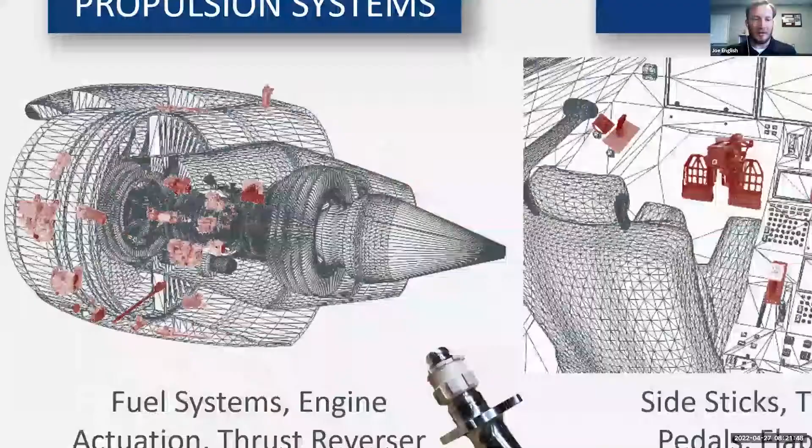Woodward as a whole, we make a lot of different turbine combustion components. Now that means everything in a turbine engine, like you see here on the left-hand side, and all of these parts here in red. If we zoom in on them a little bit, all of these different components - fuel controls, manifolds, sensors - will deliver that jet fuel into the engine and drive the combustion process for that engine. We make all of these little red components.

Zeeland focuses on fuel nozzles, fuel injection, ignition. And the cool part is on the military side, we work on afterburners, which take you from a few hundred miles per hour to over the speed of sound, breaking the sound barrier. So it's cool to be involved in hardware like that. The rest of Woodward also makes flight controls and various hydraulic actuation components on a plane. So if you've flown in the past, I don't know, 60 years or so, you've probably interacted with a Woodward component in one way or another.

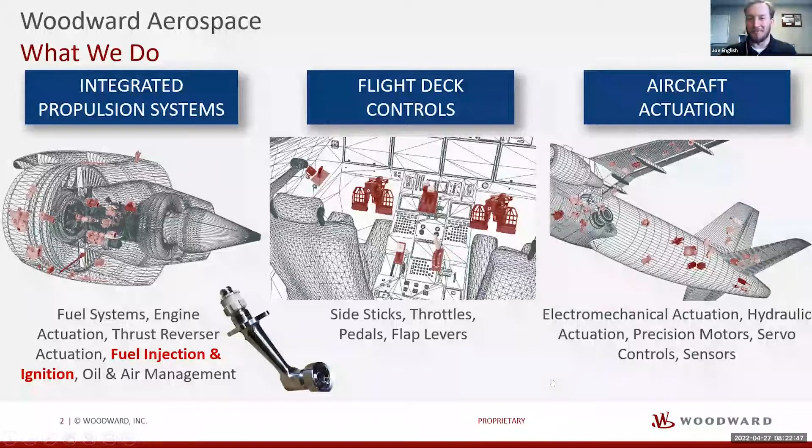So let's get into what AM is. Additive manufacturing is simply a term used to describe any manufacturing method where material is added rather than removed. Where Michael was talking about milling or a lathe, turning and that kind of thing, material is being subtracted away until you reach your final shape that you want to use.

For our process, my team focuses on additive, and that can mean plastic additive manufacturing, where you have say a vat of resin that gets processed by a light, and then you build it up layer by layer. Or some of you may have seen an FDM machine where a filament is deposited by a small head, and that runs around until you reach your final shape.

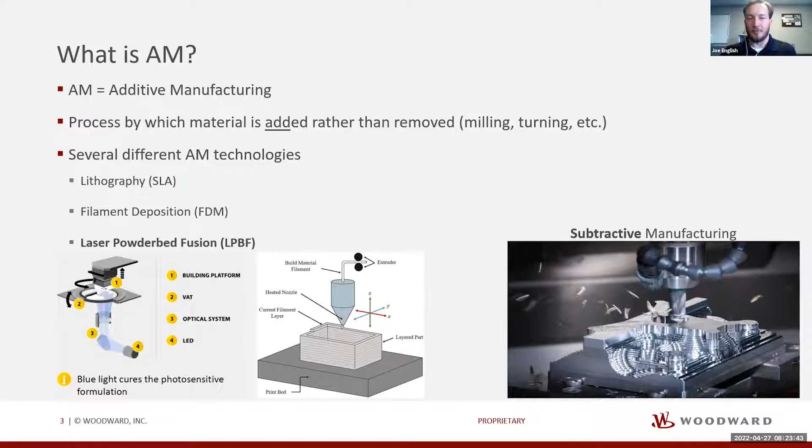But the process my team works with is mainly laser powder bed fusion. I know this is a pretty busy slide, but maybe you guys will have a chance to look over this later. What we focus on is delivering this very fine metal powder - it's almost like dust - into a working chamber. And then we take basically a laser and we weld that powder to surrounding melted material and the powder itself to build our shape up. I'll have a little video that shows how that works.

But once you fuse an individual layer, this platform moves down, and then you provide a little bit more dust, and then you weld that again, and you do that over and over and over until you've built up your part within the powder bed chamber.

Now, there's a lot of other technologies in this space that I'm not going to focus on today, but I really encourage you guys to look up because it's really interesting, and there's going to be a lot of opportunities for interested engineers and interested manufacturing people to get involved with this technology. So directed energy deposition is very similar to that FDM, where metal is welded and placed onto the hardware at the same time.

There's some really cool developments out in California where people like SpaceX or rocket companies are basically 3D printing entire rocket combustors or rocket nozzles. You can look up some cool videos on that.

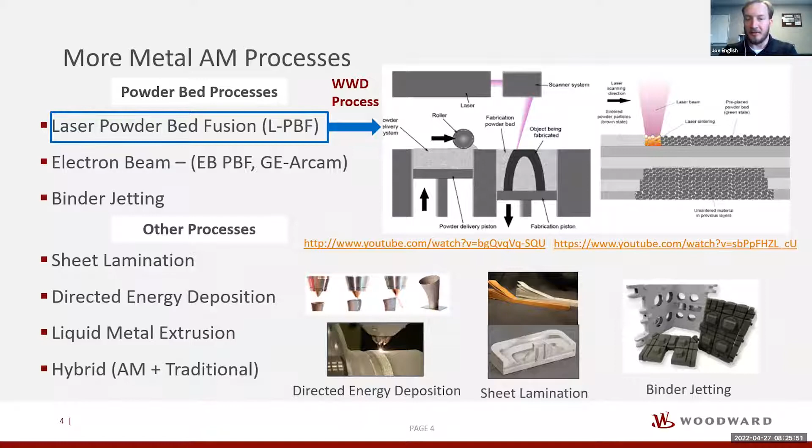And then there's other exciting technologies where they're combining additive manufacturing and subtractive manufacturing. So you would have one component of your machine that adds material up, and then another component, say a tool, that comes in and removes material to the exact final shape you need. There's some really exciting developments going on, and working with at least laser powder bed on a day-to-day basis makes my job pretty interesting.

So this is a quick look at what my workspace looks like on a day-to-day. When I first joined the group, we were in a small room, maybe the size of somebody's bedroom, with one machine in there. Now we've quickly expanded to where we have 4 machines, and we're going to get 3 more printers this year.

And this facility is all very safety centric. That metal dust, you have to be very careful with to make sure it doesn't get on your skin, get in your lungs, or combust—not necessarily in a very volatile way, but you have to be very careful with it. So we're very safety centric here.

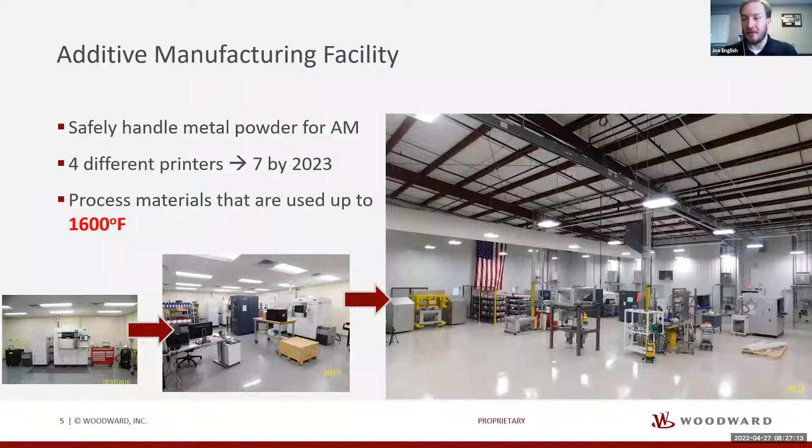And the cool thing is we work with materials that are used in the jet engine, and that's a very harsh environment. The engine can get up to 1600, 1800, 2100 degrees depending on where you are. So our materials right now can actually be used within negative 60 to 1600 degrees Fahrenheit, and we have to be able to design for all of that. My team works to make those components.

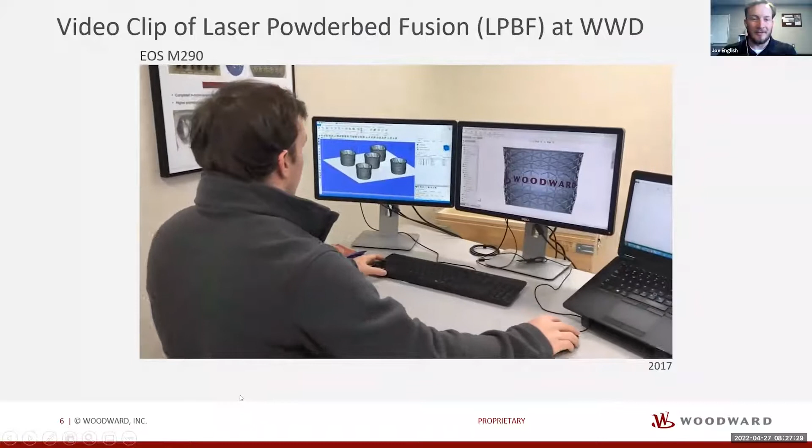Let's go through a quick clip. I don't want to take the whole time sharing this, but we made this a handful of years ago in 2017. That is yours truly, with a bit less hair on my face, more hair on my head. But this is a quick look at the machine.

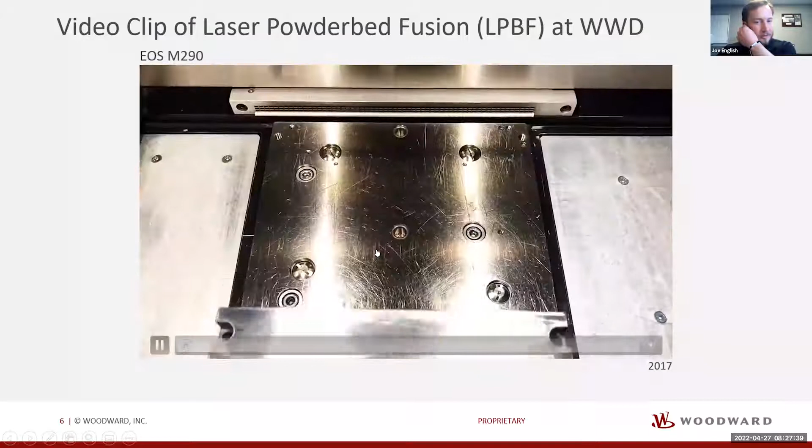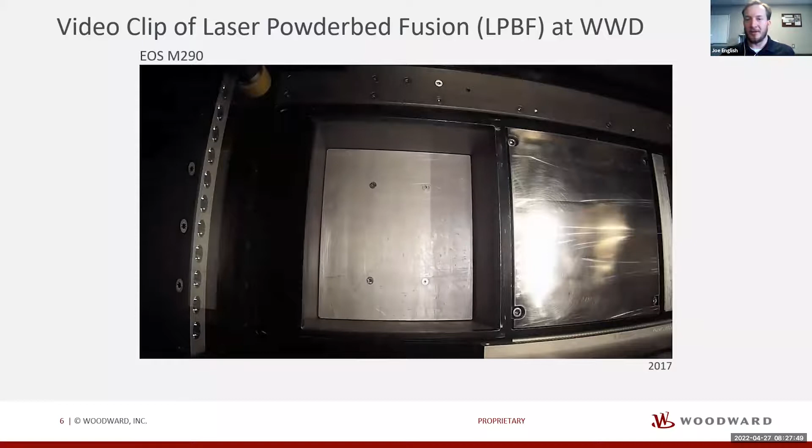So when we load in a plate to get it started, we have to take a stainless steel build plate and actually bolt that into the machine. That's the platform used for everything else to be built on. We have to make sure that's really flat so those first welds have good adhesion to the build plate. Then we load in this powder and run it through a sieve, kind of like what you might have seen in a sandbox growing up, to take any of those really big clumps out.

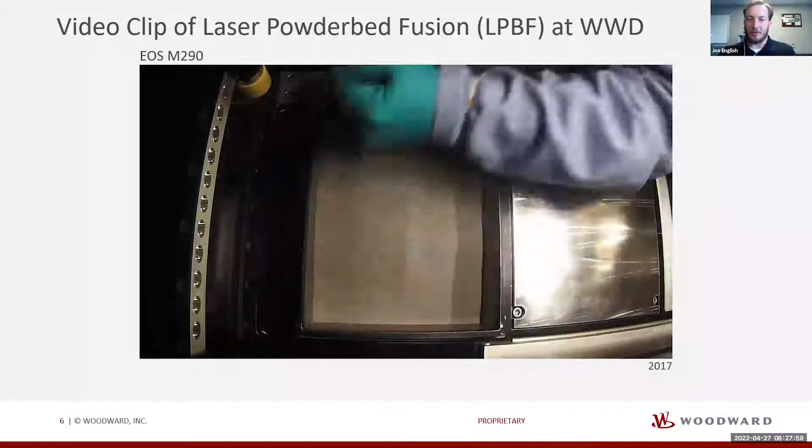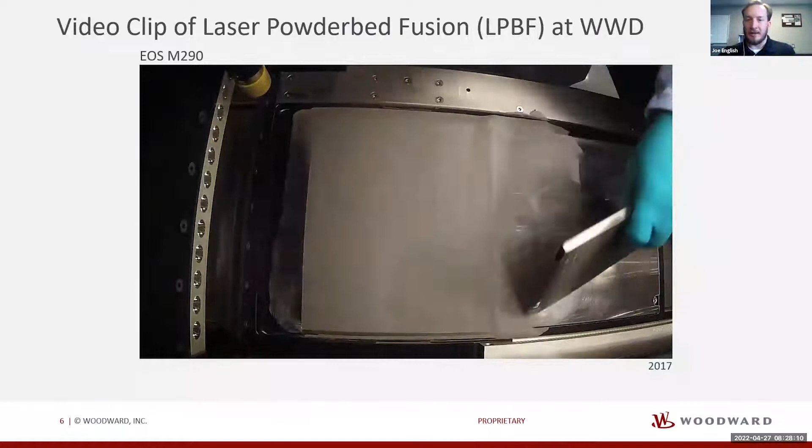We flatten that out and make sure the machine is ready for those first couple of layers, again just to make sure those first layers are good so the rest of the process is stable.

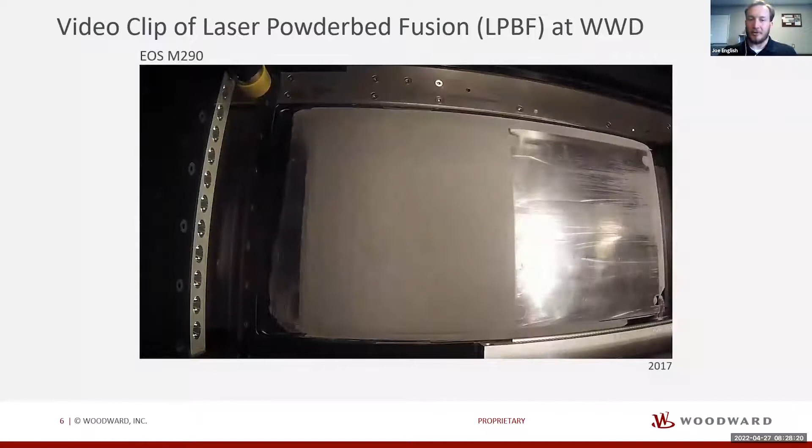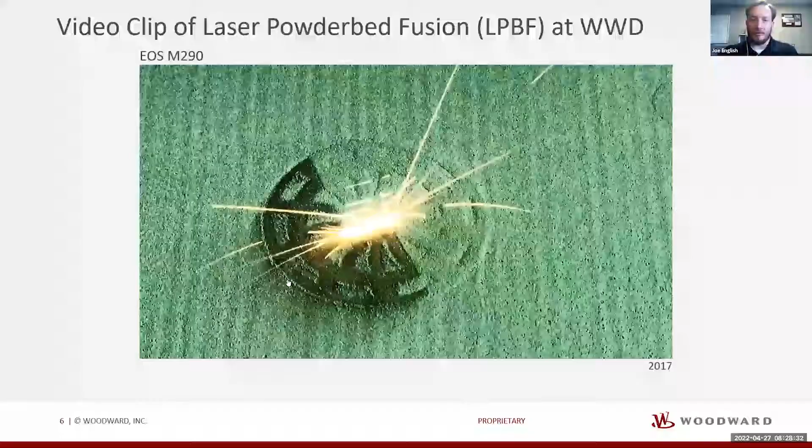So this is a top-down view, and now we're on the side, showing the laser actually welding that dust to the metal plate. It looks like it's moving across in a band, but really it's moving at nearly 1 meter per second at a small spot size, jumping back and forth across the part. So it looks like a band, but it's actually just moving that quickly.

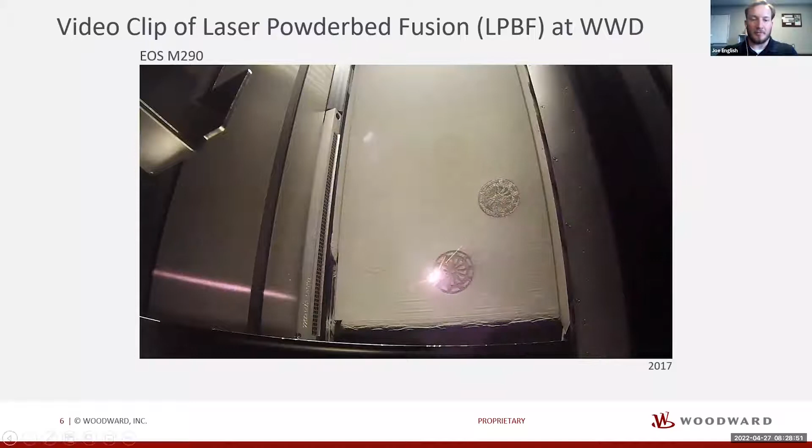This is going to be fast forwarded, but if I pause, you'll see this middle platform move down. This recoater arm will come across and provide a new layer of powder. We repeat that over and over, say 2,000 times, and then your part is done.

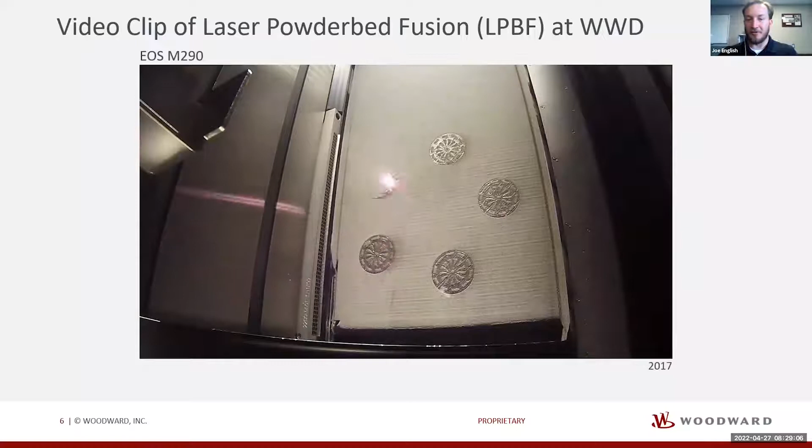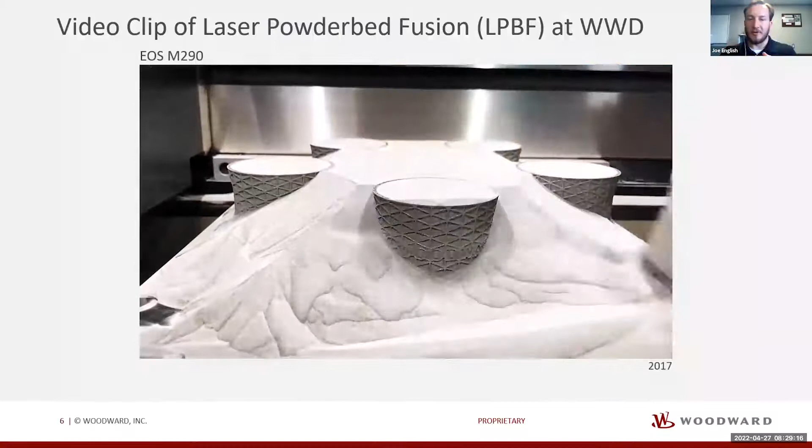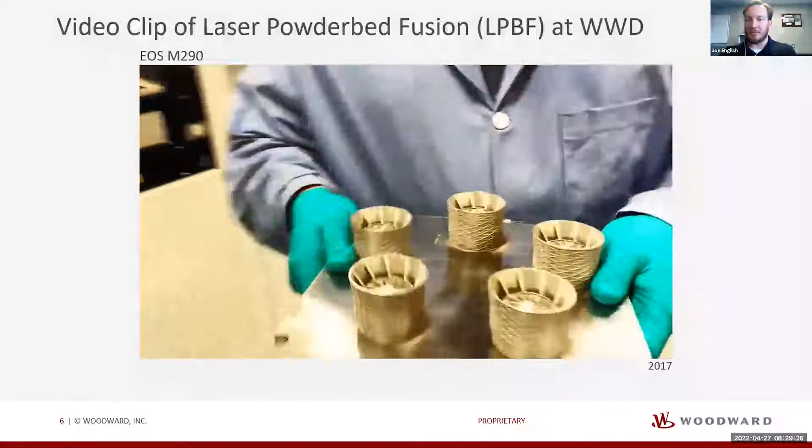You'll see our technician is going to clean this out. The only solid material in there is what's been welded together, so there's a lot of extra powder that we need to remove and reuse. But then your final shape is really only where that laser has been applied. That allows us to generate really cool 3D shapes, these lattice structures on the outside of the parts, and really have a new design space that maybe we wouldn't have been able to work in, say, 20 years ago.

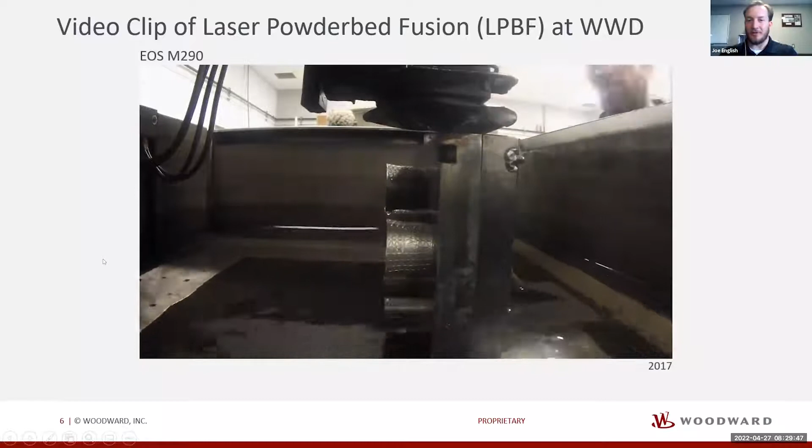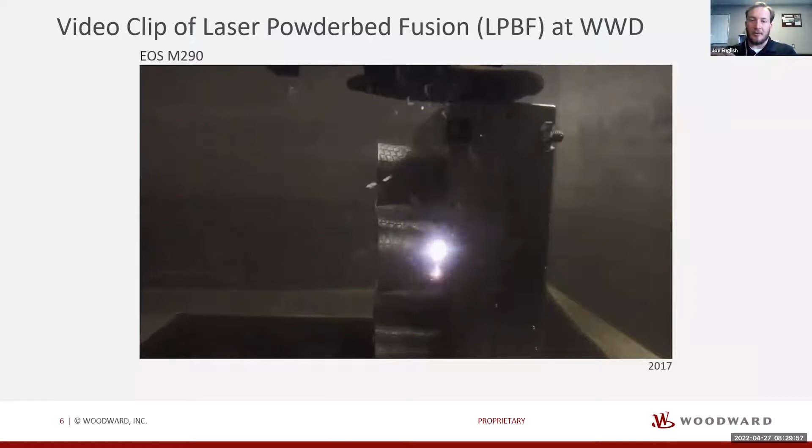Because these parts are welded to the steel plate, we have to separate them. We use what's called an EDM, an electric discharge machine. There's a wire that moves across there and it's charged electrically, and as it moves across the parts, it actually cuts through the material and separates it out. And then we have our final working piece there.

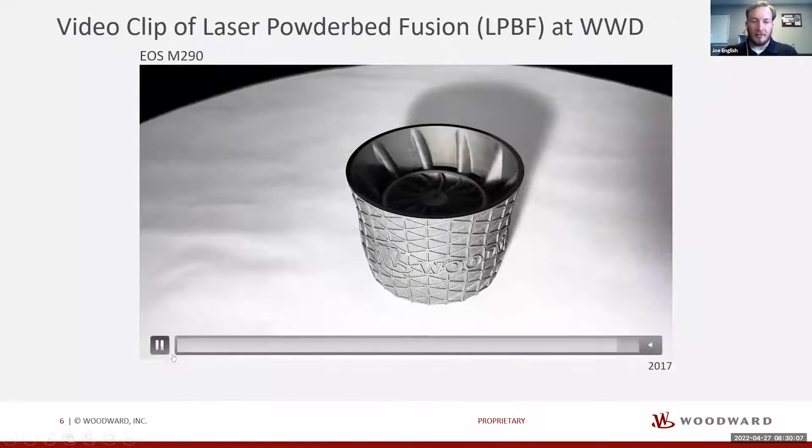Here are a couple other examples of what we've done in the past. Some cool parts. How long does it take to make a part like that, Joe? That part we looked at, we printed 5 of them, and it took about 24 hours.

The slow part of the process is that each layer is 0.0015 inches thick, thinner than a normal piece of hair, which is about 0.002 inches thick. We build each of these stacks up in even smaller increments than that. So it takes a long time, but for aerospace components we have to be very precise. We have to make sure the material is very dense, with no holes in there or anything like that. So that's how our process works.

Great, thank you. So some cool different components here. Obviously this type of connection isn't something typically seen on conventionally manufactured parts. This is a heat exchanger. If people aren't familiar with that, typically you would feed, say, hot fuel into one side, and then take another cold liquid, maybe cold oil, and run them side by side inside a thin walled structure. That allows you to cool one and heat the other, exchanging heat between the two fluids, then continue that downstream for whatever engine or process you're working in. This 3D manufacturing technology really opens that up.

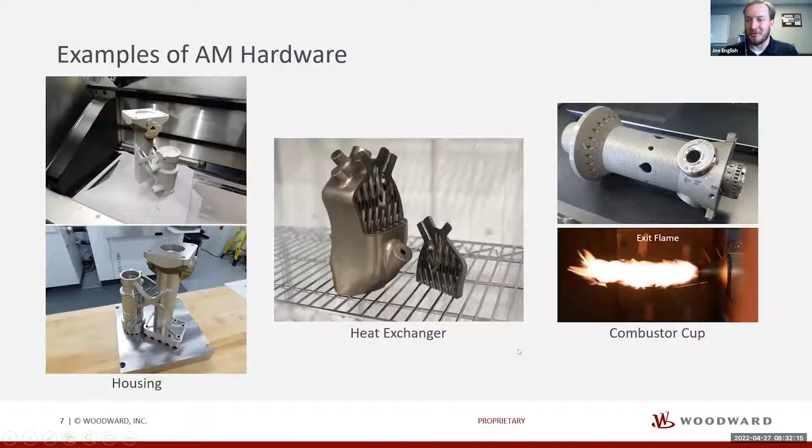And everybody likes a good fire, likes a good flame. Working at Woodward with combustion components, we do get to ignite things every once in a while, which is always exciting. So here's a photo of one of our combustor cups.

A little bit more about what our engineering team does in general. My group is pretty highly focused in the AM space and those machines, but we have a pretty large engineering team and a lot goes into these fuel nozzles. If you think about a spray hose attachment, a nozzle at the end, you can change the tip, rotate it so you get a jet, a cone spray, or a flat spray. Our customers send us specifications saying your spray should look like a cone at a very specific angle, and we want each droplet of fuel to be only 70 microns so it's easier for it to light off, so the combustor can be more efficient.

And so we test that. We send lasers through the fuel spray and capture data to understand what those droplet sizes are. We spray through a flat bed of lasers to capture the different focus points of the spray. If we have a 6-point injector, we can look at where the spray is focused and where it's more light. And then we have our own test facility where we can actually light off components in a really long rig, running extremely hot air, say 900-degree Fahrenheit air, around our components, and then attempting to light that off.

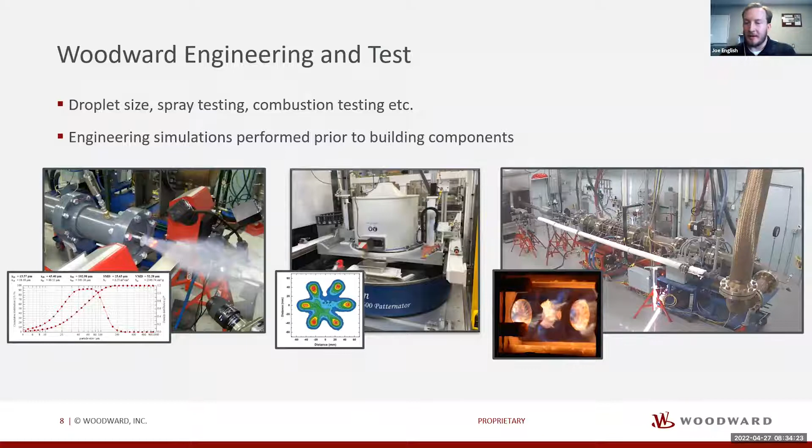So there's a lot that goes into this. It's not just the day-to-day testing, but we do a lot of computer simulation around this work as well. Before we build the parts, we'll simulate what my spray is going to look like, what my drops are going to look like, all of that stuff. So there's a lot of different avenues, whether you're more computer centric, or more hands-on and want to turn a wrench and put these things together. There's a lot of different opportunities.

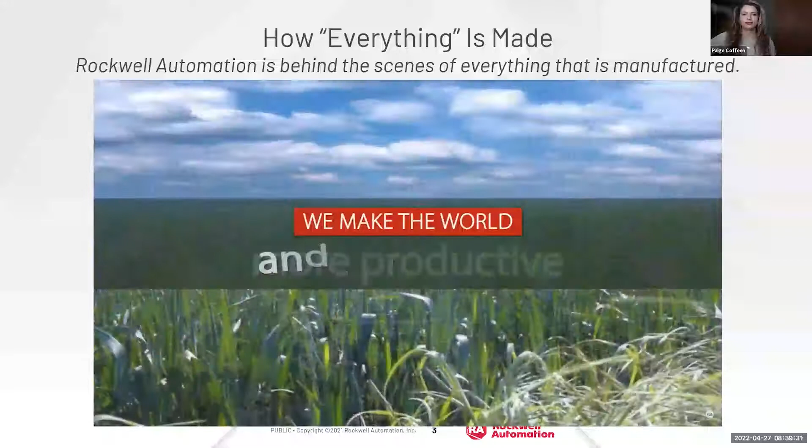So Rockwell Automation might not be a name you've specifically heard of, but we are behind just about everything and anything that is manufactured. Also in the video you might have seen a roller coaster—Rockwell Automation has devices on roller coasters to help tell them where to go and how to keep people safe on that ride. So everywhere you go, you're probably running into our products and you don't even know it.

We're actually the world's largest company dedicated to automation and manufacturing. In the video, there were some devices with blinking lights controlling robot arms that were making a vehicle—we create those devices. We also create stack lights and monitors that pair with our software to help automate that manufacturing.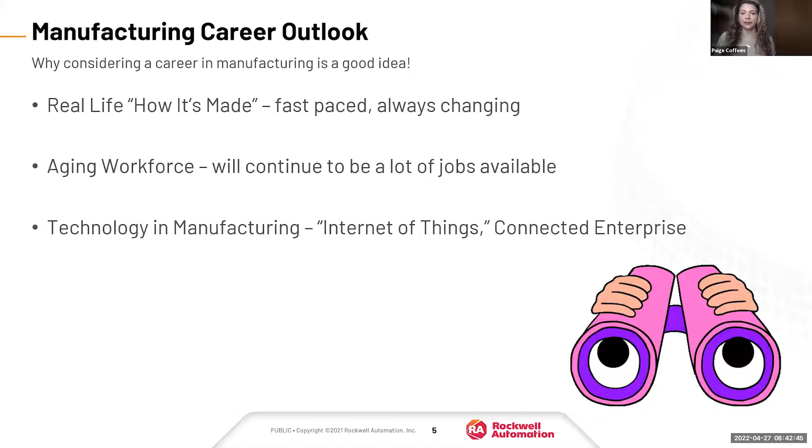Math and science were the subjects that I was really only good at, so I felt like I needed to embrace those and figure out how to make them a passion. Starting in middle school, I looked at what opportunities I had to advance my skills and found that there was a center for advanced math and science for the county.

I had to go and take a chance and take a test to try to get into the top 20 of the county, and I ended up being able to be part of that group.

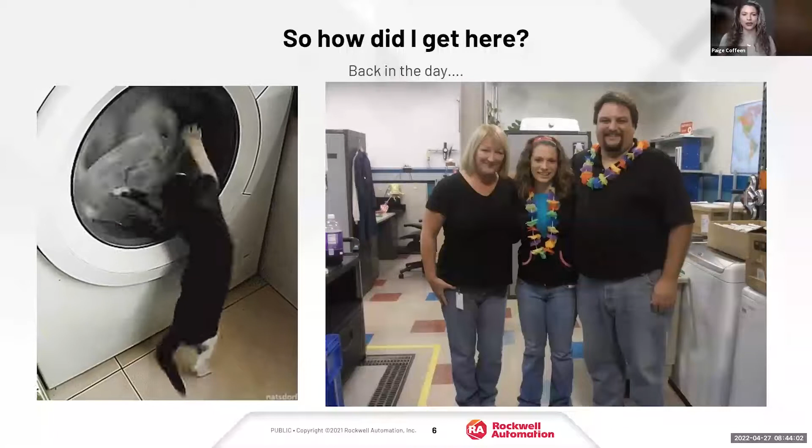From there, I moved into high school and I got a job at a controls lab at Whirlpool. That's a picture of me in my lab, and this is where I learned a lot of the hands-on skills that an engineer would see.

I learned how to solder circuits, I learned how to build test stands, and I also learned the importance of life cycle testing for products that are meant for households, because as a consumer, you want to purchase a washing machine that's going to last a very long time. So I learned a lot of those hands-on skills, and it just reassured me that I wanted to go into engineering, and more specifically, electrical engineering.

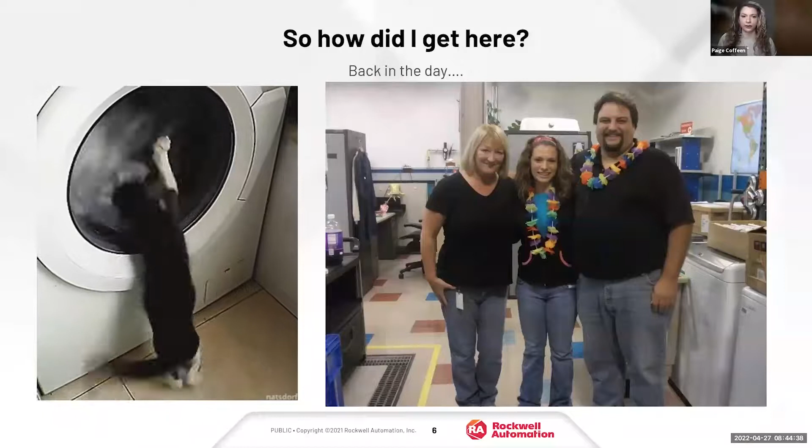So then I decided to take that appreciation for engineering and attend Western Michigan University as an electrical engineering student. Although I learned a lot about circuits and electrical theory, I think the most important thing that I learned was how to think like an engineer.

It doesn't matter what discipline you want to go into, or if you even want to end up in engineering—that thought process is a really strong skill to be able to learn through school.

So what does that look like? Really, it's how you approach problem solving, and your focus and mindset around how am I going to get from point A to point B. Through that could be design iterations, taking in data and analyzing it, and then testing through those designs. And of course, continuous improvement, because we're constantly trying to re-engineer and make the best and latest and greatest.

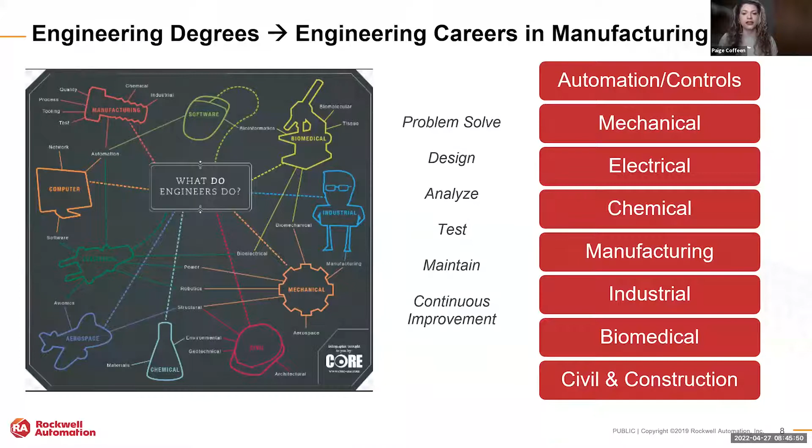Learning that engineering mindset will flow through all of these different engineering disciplines, whether you decide to go electrical, biomedical, or even into trade school. It's a mindset that helps work through problem solving.

Continuing through, so I went to Western, and while I was working through my education, I learned how to fail, and fail hard. In high school and middle school, math and science were my forte—they were easy for me.

And when I got to college, I failed my first class. I failed Circuits 101, and as an electrical engineer, that should be the easy class. So I really had to dig deep and figure out if this is really what I wanted to do.

Through that, learning how to fail and move on was such a great lesson, because in my role, I still have failure moments, but being able to pick up and move on is what helps me continue to be successful.

So I feel like that was a very big pivotal moment for me in college. In college, I went through and did a design engineering internship at an automotive manufacturing facility, and I was on their machine design team. I got to learn all about how to design a machine and how to make it safe for manufacturing, because there was going to be human interaction with it.

And this is kind of what led me to stumbling into technical sales. Although I loved design, it wasn't necessarily what I saw myself doing in the future, but I certainly wanted to stay in that industry. So it actually took a manager to tell me, hey, I think you'd be good at technical sales, and then me digging in and deciding that that would be a great path for me.